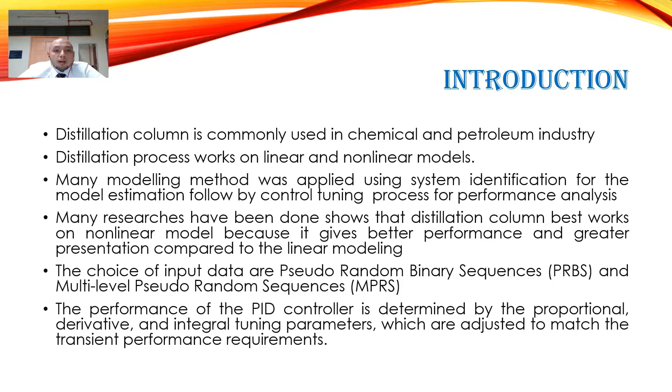The choice of input data are pseudo-random binary sequence (PRBS) and multi-level pseudo-random sequence (MPRS). The performance of the PID control is determined by the proportional, derivative and integral tuning parameters, which are adjusted to match the transient performance requirement.

This slide shows the problem statement for this project. In comparison to linear modeling, it has been discovered that the nonlinear model produces better performance and presentation. Unfortunately, using a nonlinear system modeled with a linear method has significant drawbacks related to the validity of the input set.

Furthermore, distillation column control systems have frequently encountered issues or constraints such as difficulty regulating the process and poor control performance. Therefore, this study aims to investigate the performance comparison between linear and nonlinear modeling using system identification in MATLAB to identify the comparison between the linear and nonlinear modeling. At the same time, using MATLAB for PID control on Ziegler-Nichols, Cohen-Coon, Chien-Hrones-Reswick, and Takahashi.

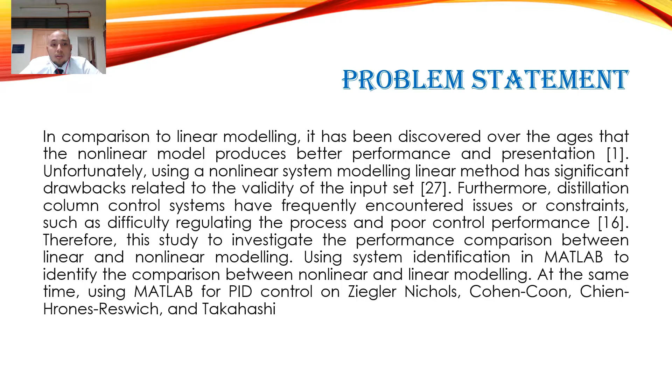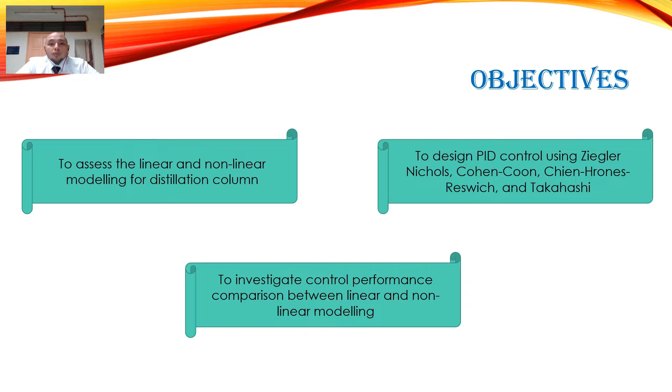The objectives for this project are to assess the linear and nonlinear modeling for distillation column, to design PID control using Ziegler-Nichols, Cohen-Coon, Chien-Hrones-Reswick, and Takahashi, and finally to investigate control performance comparison between linear and nonlinear modeling.

This part is for methodology. Figure 1 shows the flowchart for this project. The flowchart starts from start to the linear and nonlinear modeling using PRBS and MPRS.

After that, we go to the model structure selection, then model validation. After that, we decide if the model is accepted or not. If no, we go back to the model structure selection. If yes, we go to the transfer function estimation. After the transfer function estimation, we will decide if the estimation is accepted, yes or no. If no, we will do the transfer function estimation again. If yes, we will do PID control and performance analysis, and then end.

The open loop test in MATLAB software simulates the input data. For each input, the best fit of the input data is obtained. Simulate the transfer function to get the continuous time equation. Calculate the Kp, Ti and Td from the open loop result and simulate the block diagram. As a consequence, show the graph of 4 types of tuning that were employed. The rise time and percentage overshoot are used to measure loop efficiency.

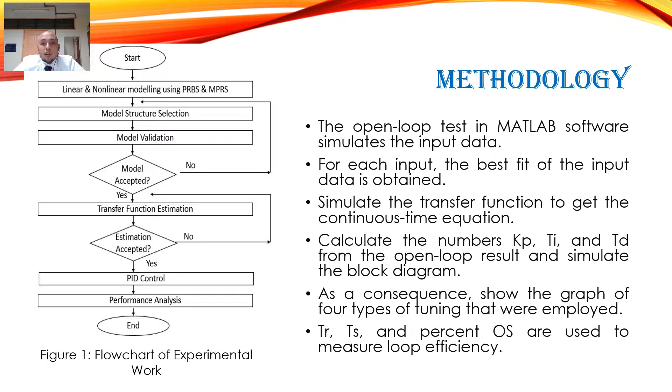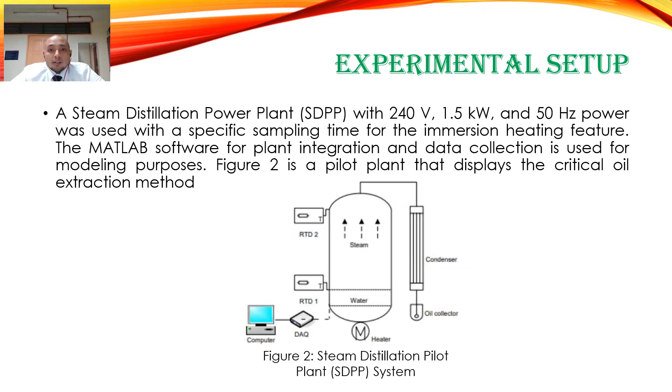For experimental setup, a steam distillation pilot plant (SDPP) with 240 volt, 1.5 kW and 50 Hz power was used with a specific sampling time for the immersion heating features. The MATLAB software for plant integration and data collection is used for modeling purposes. Figure 2 is a pilot plant that displays the critical oil extraction method.

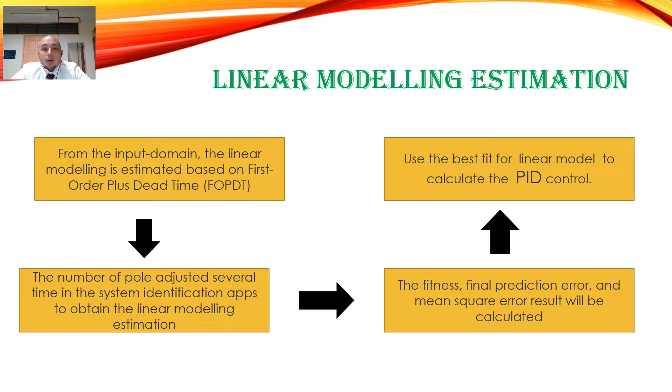This is the process where linear modeling estimation was applied. From the input domain, the linear modeling is estimated based on first order plus dead time (FOPDT). After that, the number of poles adjusted several times in the system identification app to obtain the linear modeling estimation. The fitness, final prediction error, and mean square error result will be calculated. Finally, use the best fit for the linear model to calculate the PID control.

This is part for nonlinear modeling estimation process. From the input domain, the nonlinear modeling is estimated based on a nonlinear autoregressive with exogenous input, or NARX. The number of poles adjusted several times in the system identification app to obtain the nonlinear modeling estimation. The fitness, final prediction error, and mean square error result will be calculated. Use the best fit for the nonlinear model to calculate the PID control.

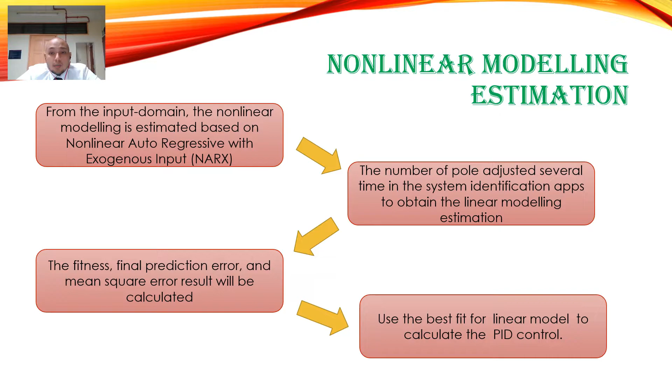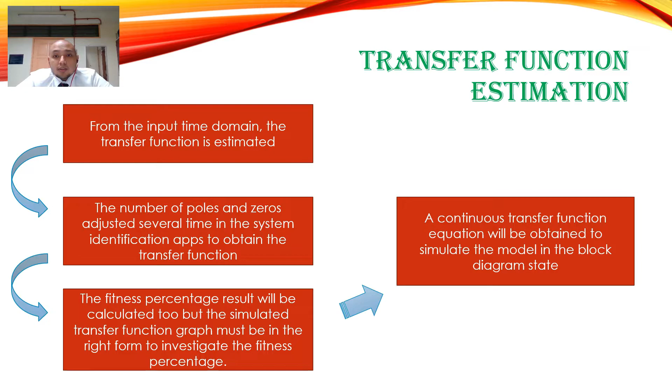This slide shows the process transfer function estimation. First, from the input time domain, the transfer function is estimated. Then, the number of poles and zeros adjusted several times in the system identification app to obtain the transfer function. Then, the fitness percentage result will be calculated, but the simulated transfer function graphs must be checked to investigate the fitness percentage. Finally, a continuous transfer function equation will be obtained to simulate the model in the block diagram state.

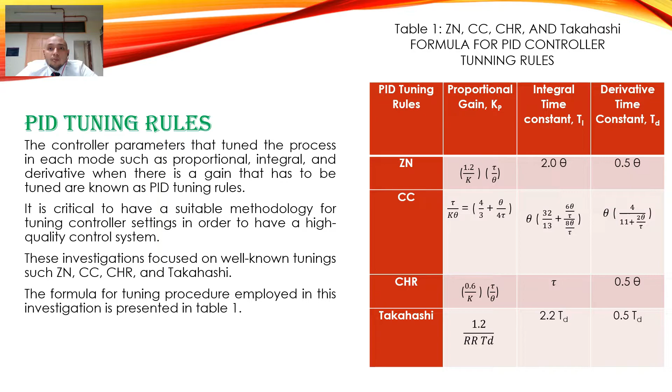The Table 1 shows ZN, CC, CHR, and Takahashi formula for PID controller tuning rule. It is part 4, result and discussion.

First, linear model estimation. From Table 2, it clearly shows that MPRS was more accurate compared to PRBS. This is because the percent fitness for MPRS was higher than PRBS, which was close to 90%. However, MPRS at pole 3 was less accurate than PRBS since the fitness was lower. MPRS pole 3 error was also higher than PRBS error. The error and loss function, lower is better.

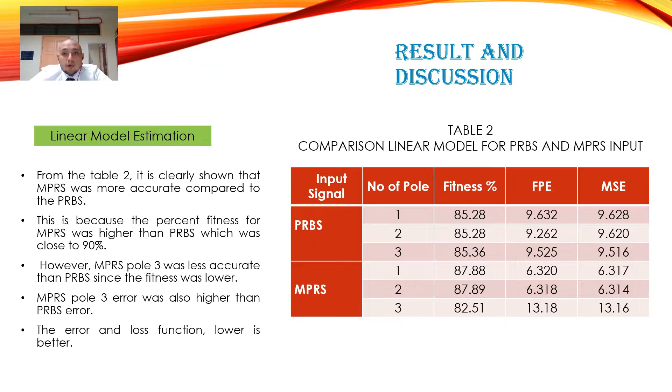Table 2 shows the comparison linear model for PRBS and MPRS input.

This slide shows the result of nonlinear model estimation. Table 3 demonstrates the comparison of nonlinear modeling in PRBS and MPRS. PRBS recorded higher fitness percent compared to MPRS. The error and loss function for PRBS was lower than MPRS, so it's good for data analysis. PRBS was more accurate in nonlinear modeling compared to MPRS based on the result. Table 3 shows the comparison nonlinear model for PRBS and MPRS input.

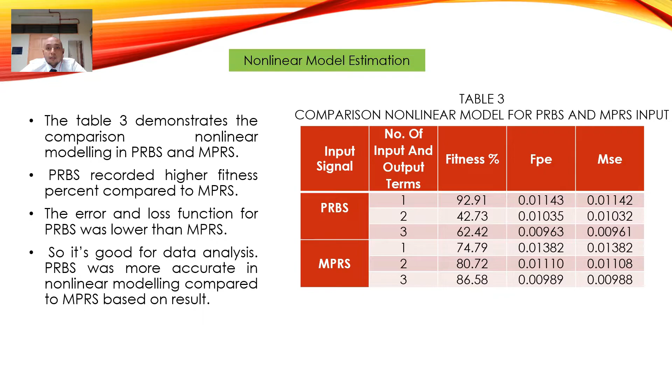Figure 3 shows the graph of linear and nonlinear in PRBS input. In comparison to the linear model, the graphs clearly show that the nonlinear model simulates the data more accurately. From the graph's nonlinear response, it shows a steady constant, same as the input line.

Therefore, the linear model line took more time to reach steady constant. Figure 3 shows the linear and nonlinear modeling using PRBS input.

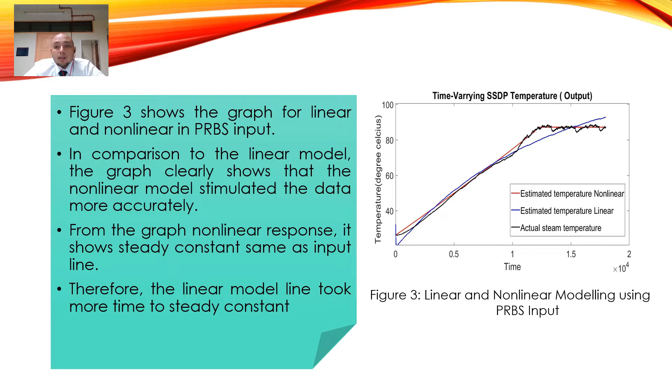Figure 4 shows the graph of linear and nonlinear modeling for MPRS input. The linear fitness percent was higher than the nonlinear fitness percent. Nonlinear model, on the other hand, has a lower MSE and FPE value than the linear model, based on Table 2 and Table 3, which conclude the nonlinear was more accurate than the linear model.

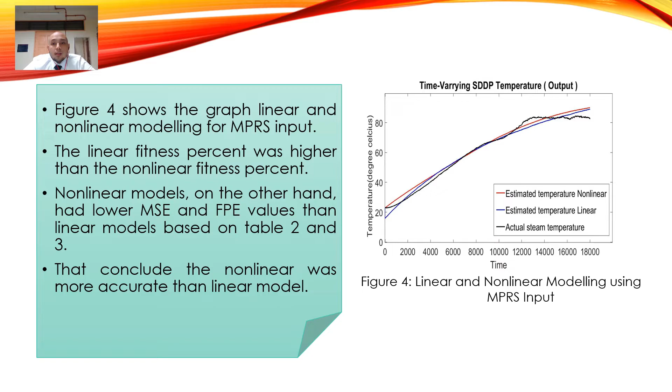Figure 4 shows the linear and nonlinear modeling using MPRS input. This is the part for transfer function estimation.

Figure 5 illustrates the outcome of transfer function estimation for PRBS and MPRS. Figure 5 shows that MPRS has a greater fitness level than PRBS. MPRS has a fitness value of 88.76%, while PRBS has a fitness value of 81.26%.

When compared to PRBS, MPRS exhibited the lowest FPE and MSE value. The FPE and MSE values for MPRS were 5.44 and 5.43 respectively, where the FPE and MSE values for PRBS were 15.62 and 15.61. Figure 5 shows linear and nonlinear modeling using transfer function estimation.

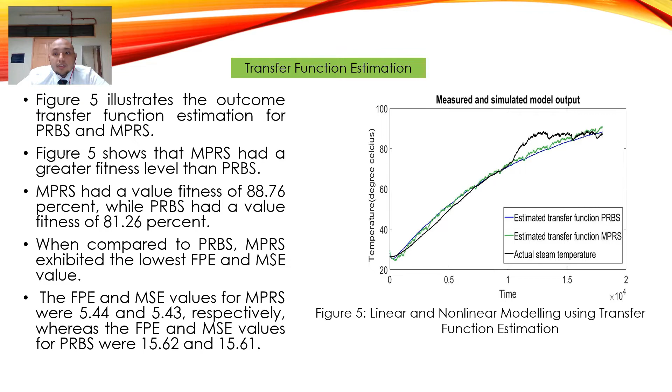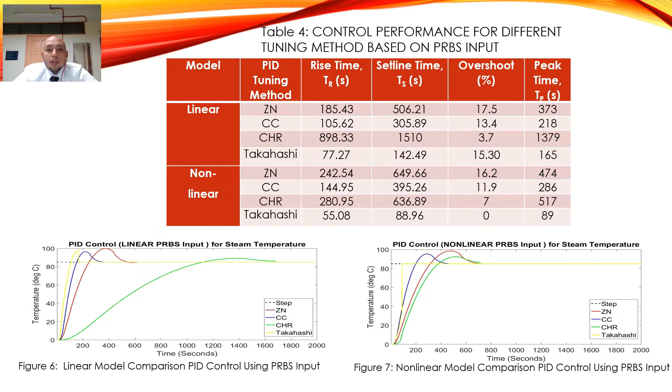Table 4 shows control performance for different tuning methods based on PRBS input. There are two models, linear and nonlinear, and for PID tuning method there are ZN, CC, CHR, and Takahashi. Below the table, there are two figures. Figure 6 shows the linear model comparison PID control using PRBS input, and Figure 7 shows the nonlinear model comparison control using PRBS input.

TP for CHR was higher than other PID. For nonlinear PRBS comparison PID in Figure 7 and Table 4, in comparison to CC, ZN, and Takahashi, the value of TR and TS in Takahashi PID tuning demonstrated a faster reaction. Then ZN produced a higher overshoot than CHR, CC, and Takahashi. However, TP for CHR was higher than other PID.

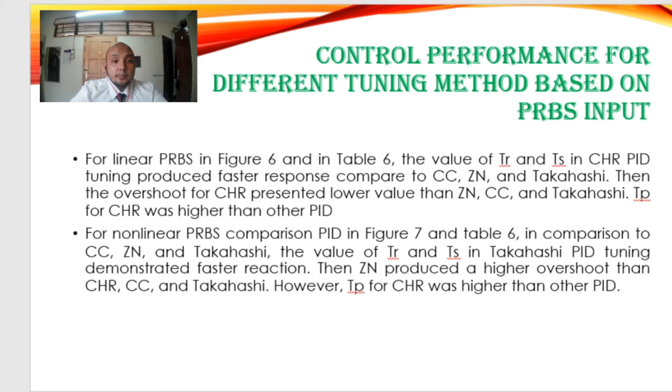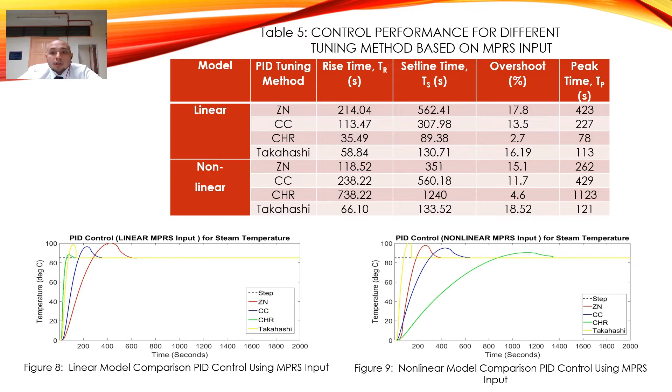This is the part for explanation for Table 7 and Figures 8 and 9, for control performance for different tuning methods based on MPRS input. For linear MPRS input, the comparison of PID control performance based on Figure 8 and Table 7, when compared to other PID, CHR has faster rise time, settling time, percent overshoot, and peak time.

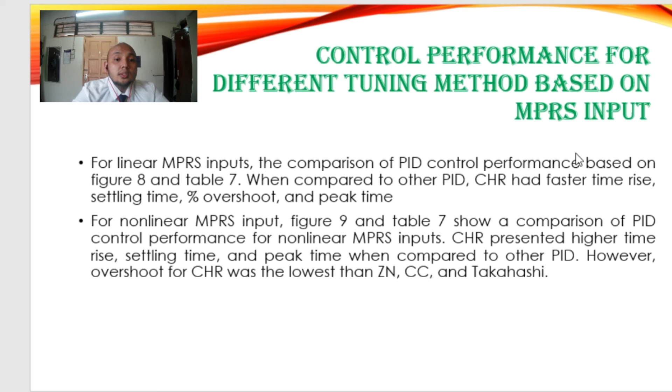For nonlinear MPRS input, Figure 9 and Table 7 show a comparison of PID control performance for nonlinear MPRS input. CHR presented higher rise time, settling time, and peak time when compared to other PID. However, overshoot for CHR was the lowest compared to ZN, CC, and Takahashi.

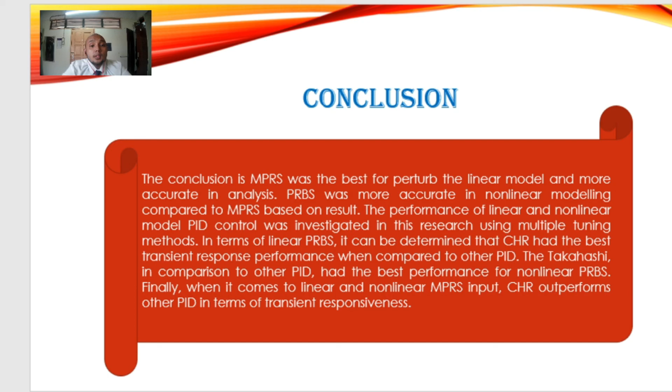Finally, when it comes to linear and nonlinear MPRS input, CHR outperforms other PID in terms of transient responsiveness. Thank you.